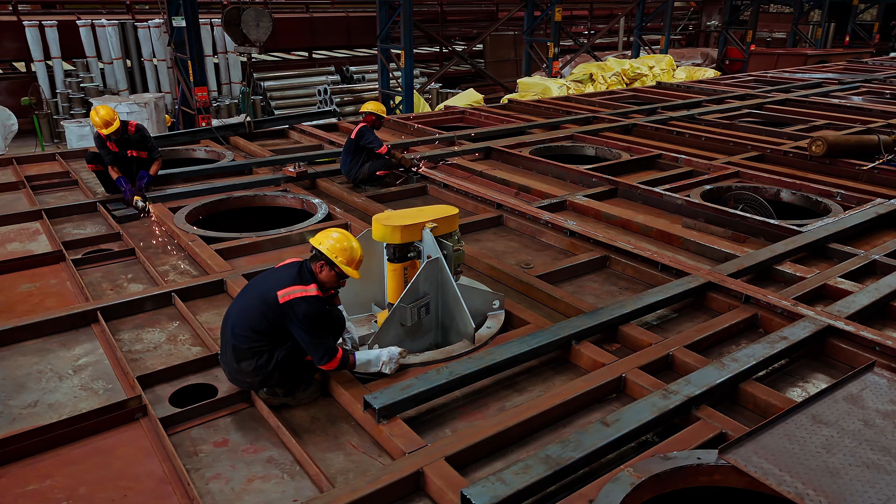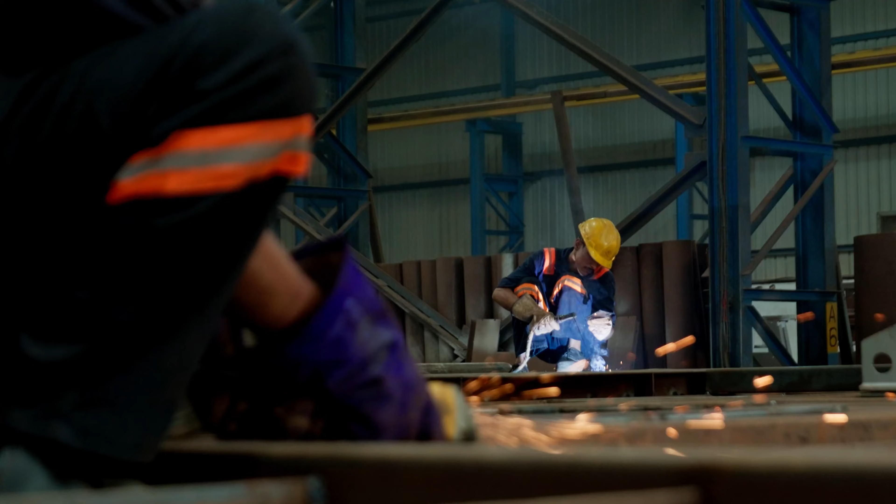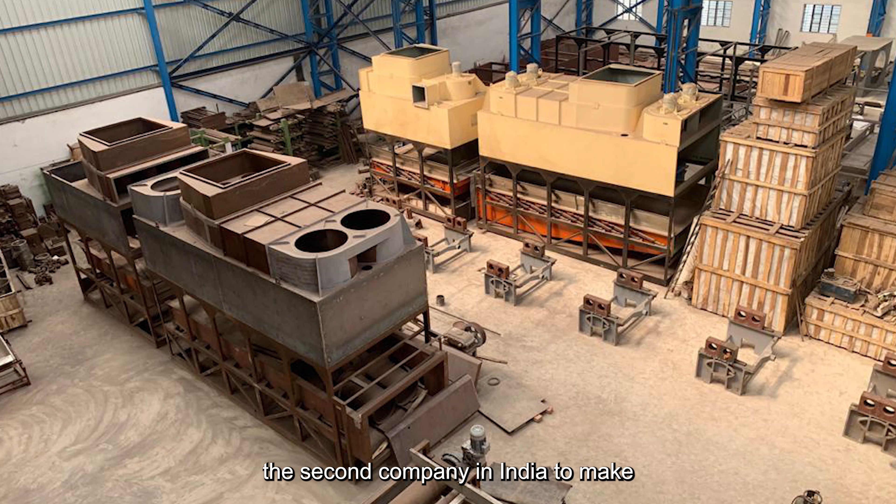For the last 3.5 decades, we've been at the forefront of engineering excellence, pushing the boundaries of what is possible in the tea sector and in the drying industry. Our journey began with my dad being the second company in India to make vibratory fluid bed dryers in the mid-90s, initially for the tea industry.

As the team evolved and the company grew, we ventured into complete turnkey tea factory equipments for CTC, orthodox and green tea processing factories. Some of the innovations that my team and I have championed and pioneered have been...

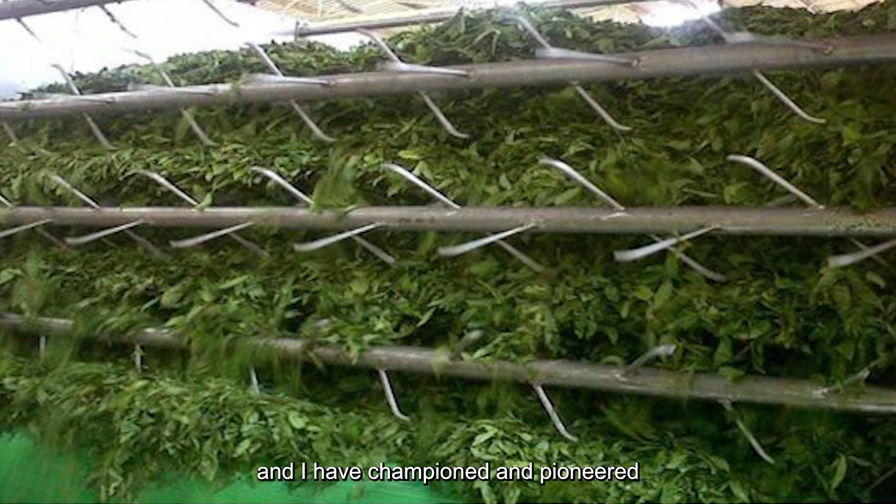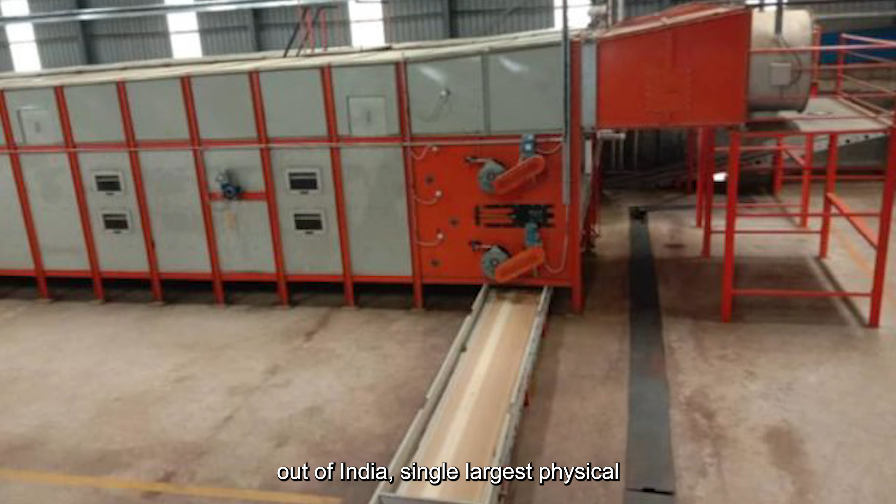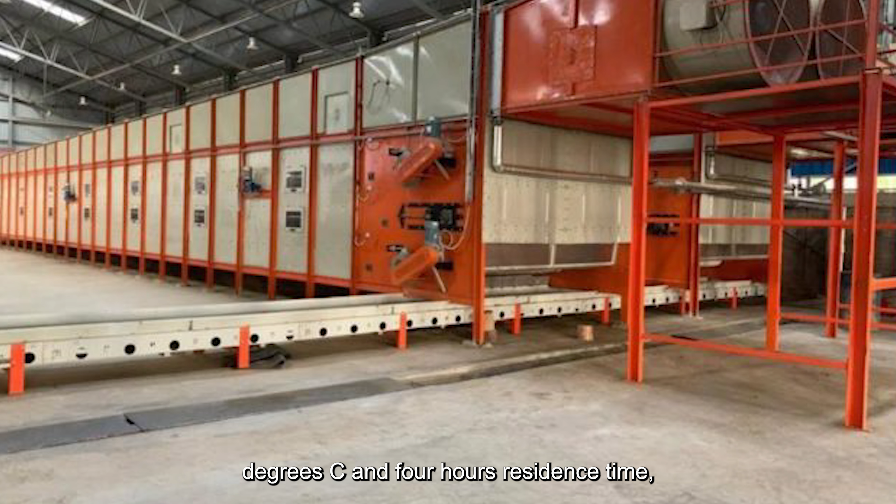The single largest chemical withering trough holding 30,000 kgs in a single equipment, the first tray chain chemical withering trough coming out of India, the single largest physical withering machine with a belt area of 480 square meters, allowing moisture reduction at low temperatures of 34 degrees C and 4 hours residence time, ensuring no damage to the leaf cells. This was the first tray chain physical withering machine ever built in the industry.

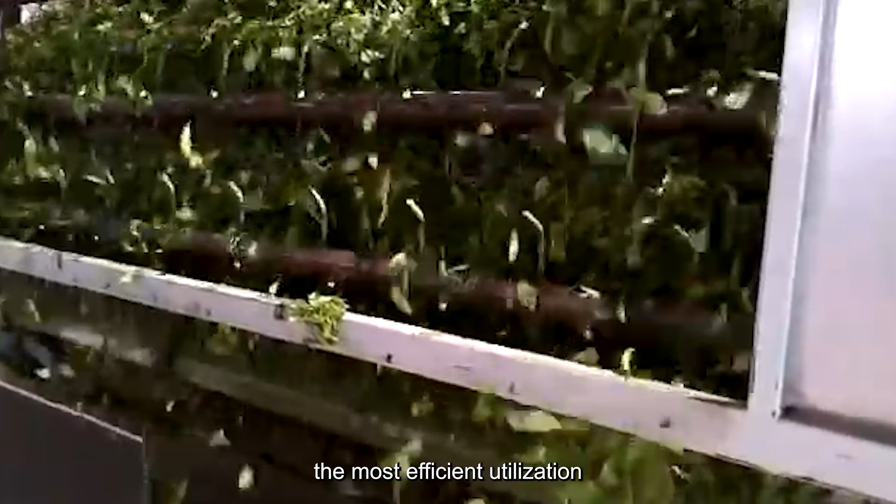And finally, we've done a project of 100,000 kgs of green leaf per day on continuous withering systems, utilizing only 2 workers and 160 horsepower of installed power, the most efficient utilization of power so far in the industry. Our contribution to the tea trade remains unparalleled in terms of value and benefit that tea producers are achieving in their operations.

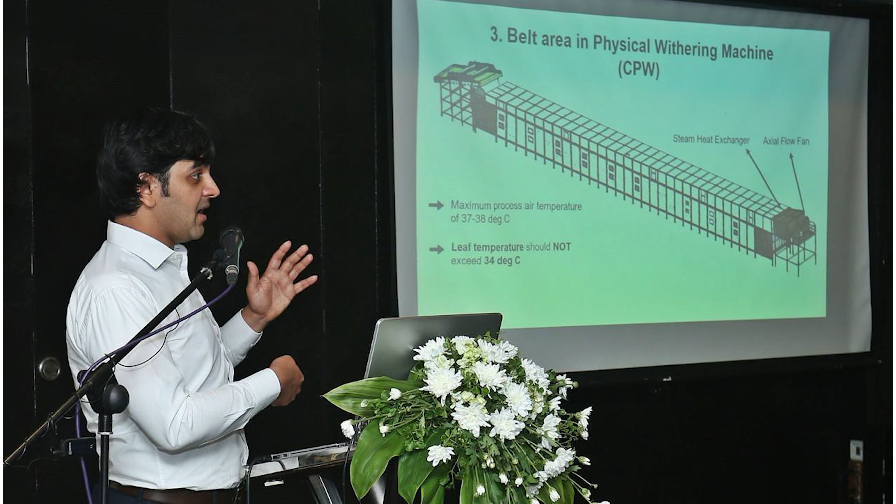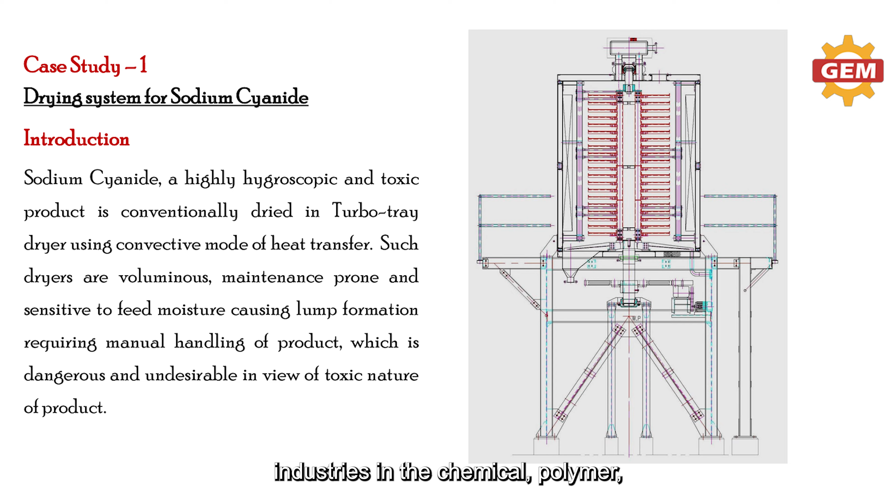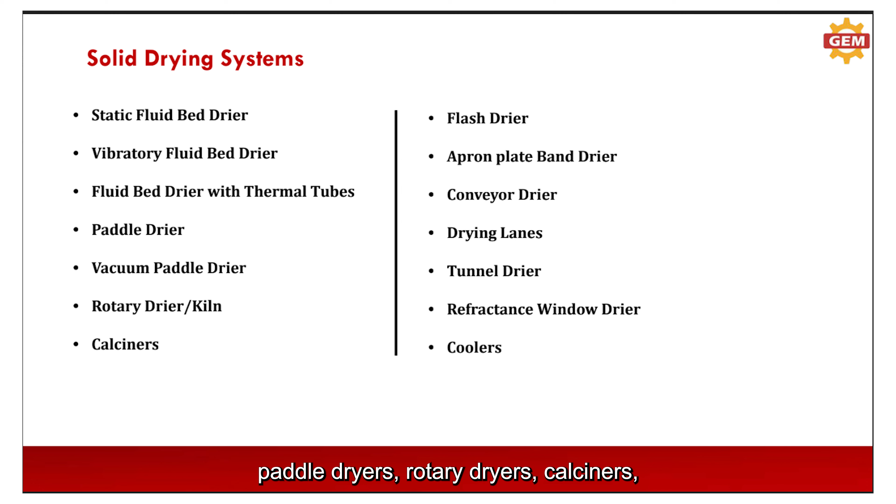Later, we've also got involved in drying systems in several industries: chemical, polymer, fertilizer, and now radioactive space. Our groundbreaking projects have been in fluid bed dryers, band dryers, paddle dryers, rotary dryers, calciners, drying lanes, and tunnel dryers. Let's take a closer look at some of our groundbreaking designs and get a sneak peek into our drying systems.

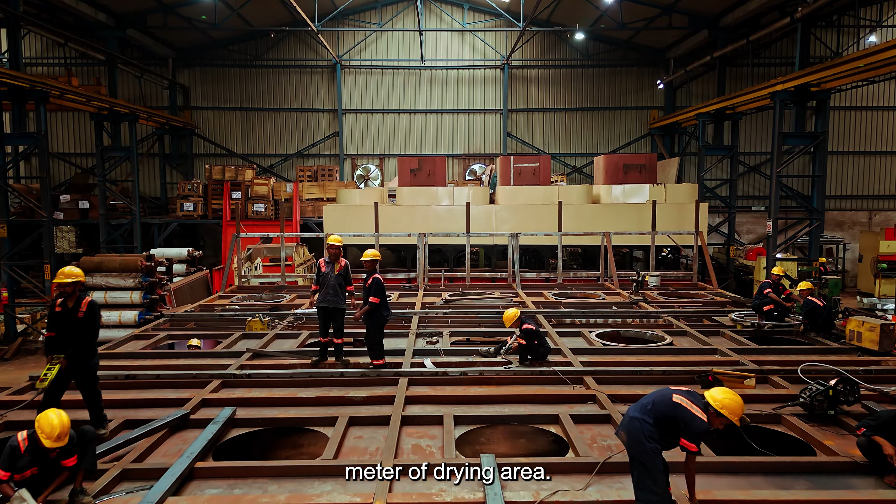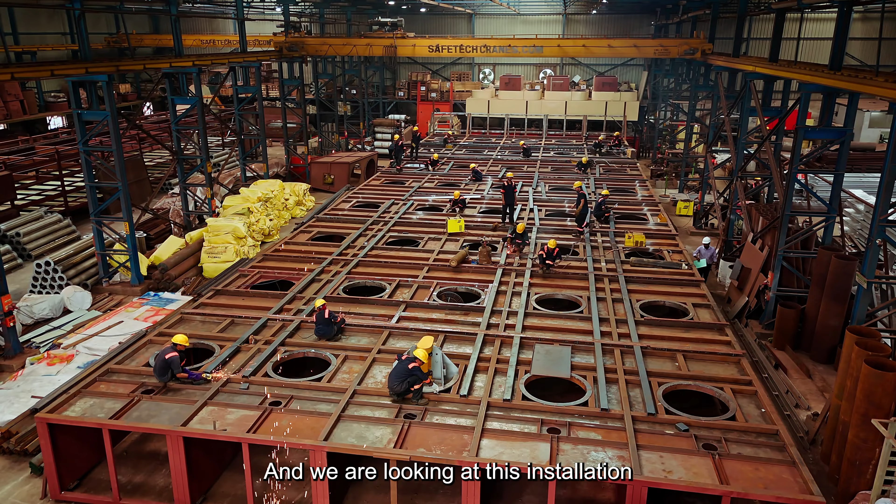We have this equipment that you see over here. It has an overall footprint of approximately 500 square meters of drying area. It has been built specifically for a company that does glass fiber manufacturing. It is actually one of the single largest dryers on the planet today, and we are looking at this installation, commissioning and testing happening in the next 2 months.

I am Mukherjee, working here as the Head of the Department of Central Planning.

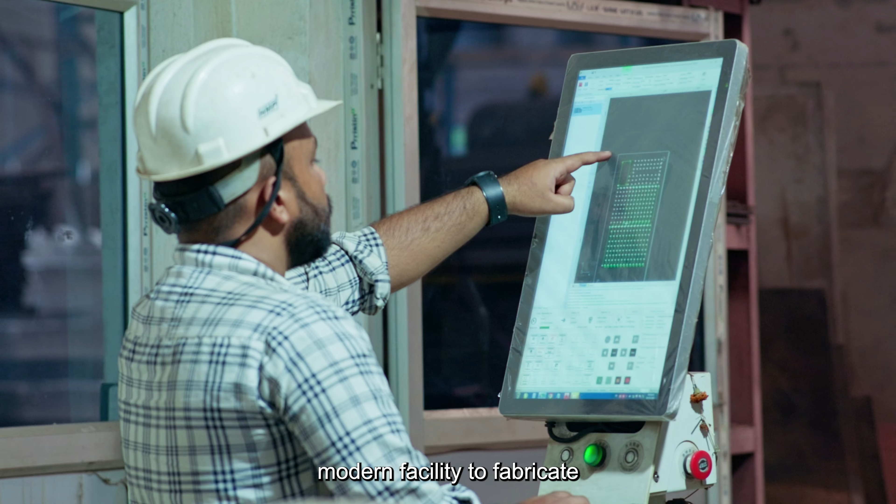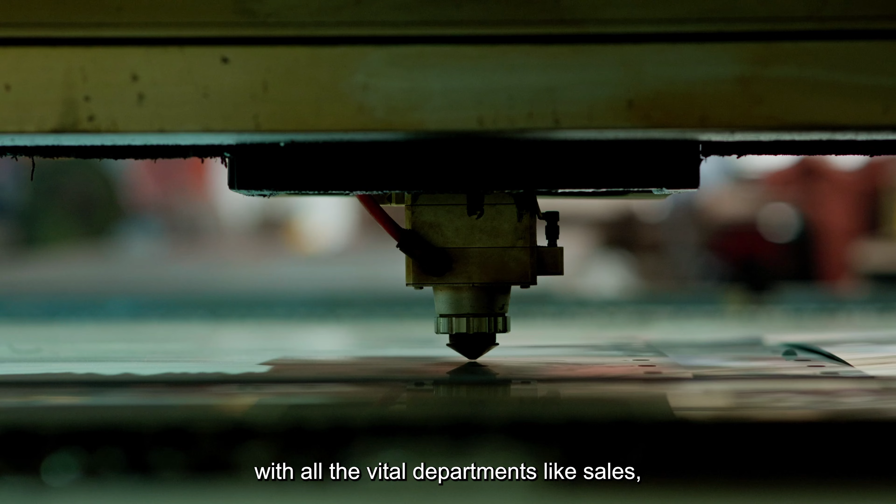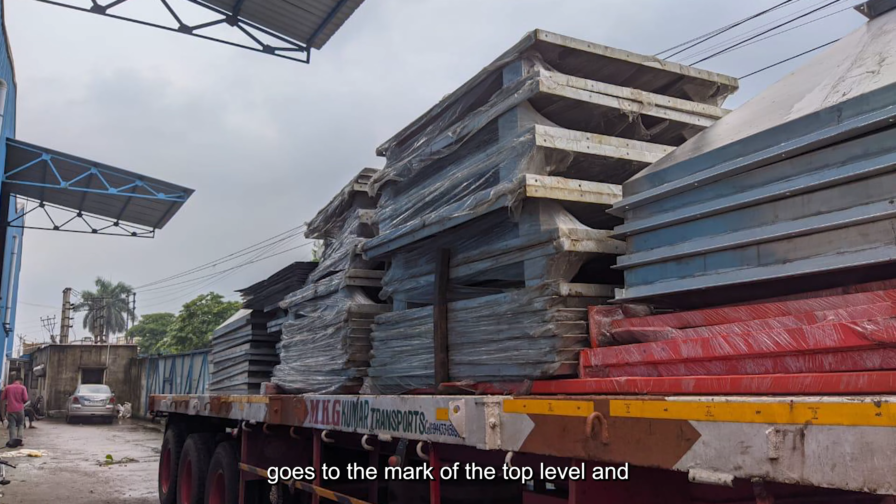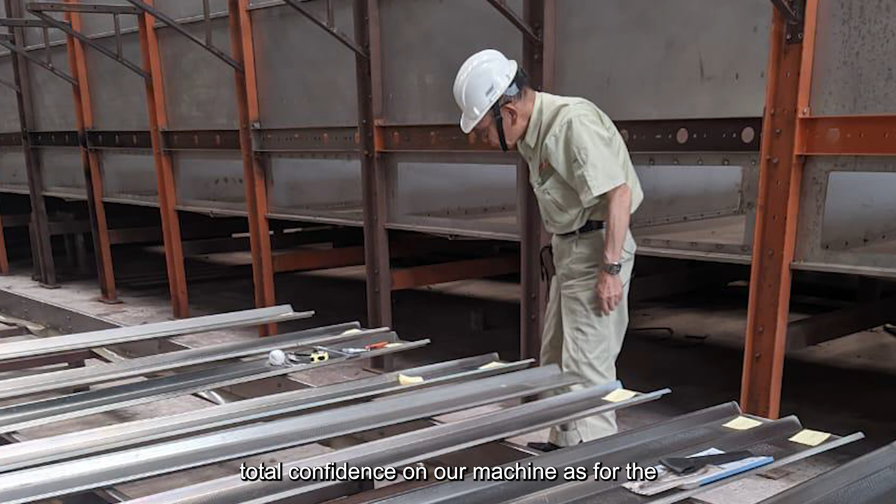Here we have the most modern facility to fabricate all our equipments, which is required in the modern technology. Our work depends on coordinating with all the vital departments like sales, project, design and development, and production up to the delivery to ensure that the machine we are manufacturing meets the top level, and clients are satisfied with the performance of the machine when it is installed correctly and smoothly, having their total confidence in our machine as per its quality and performance.

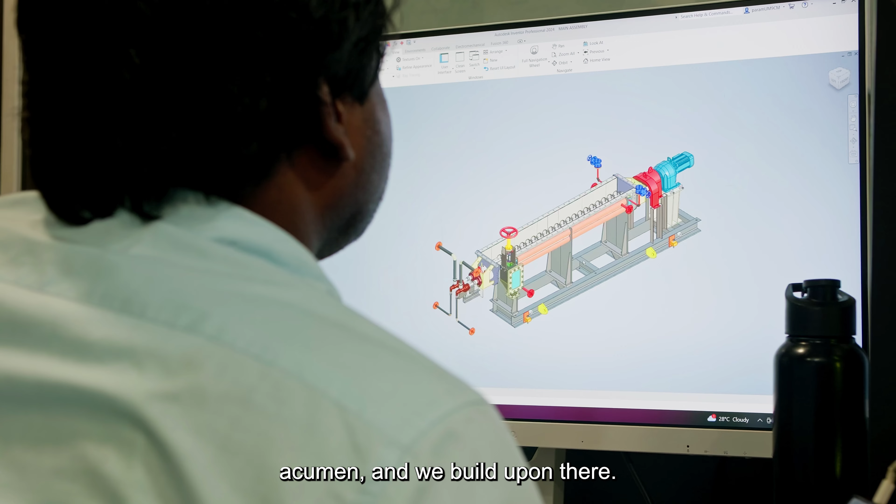In terms of our foreign collaborations, we have associations and arrangements with companies in Japan, Spain, Portugal, France, and Germany. Global Process Concepts in France and Glorinda in Germany have given us access to their designs and engineering acumen, and we build upon their technologies and experiences, integrating those futuristic designs into our machinery.

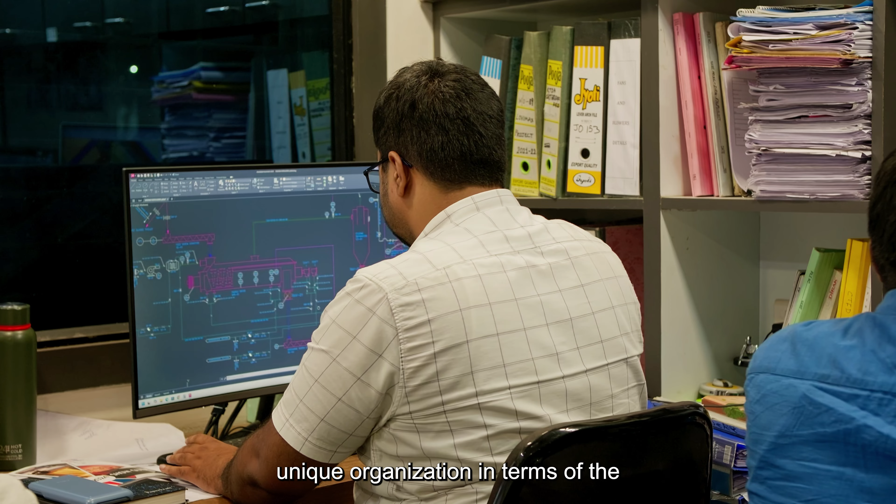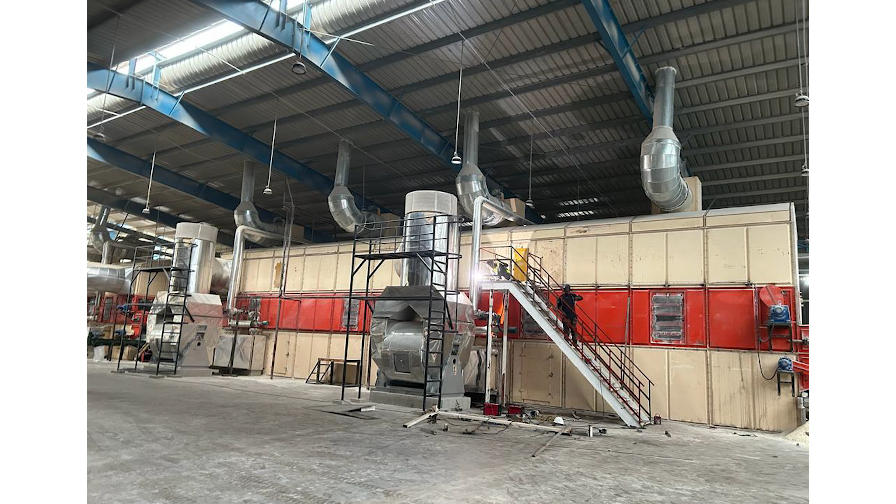Our company, GEM Machinery, is a very unique organization in terms of the knowledge, intelligence, and leadership that all of us have in this industry today. We have entered new markets, launched new products, and are doing extremely innovative projects that this industry has never seen before. We are bringing about tangible transformation in this industry.

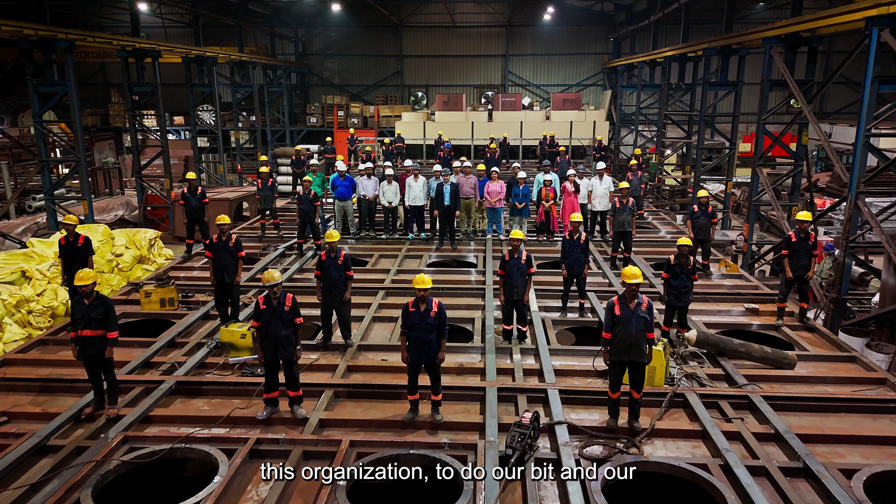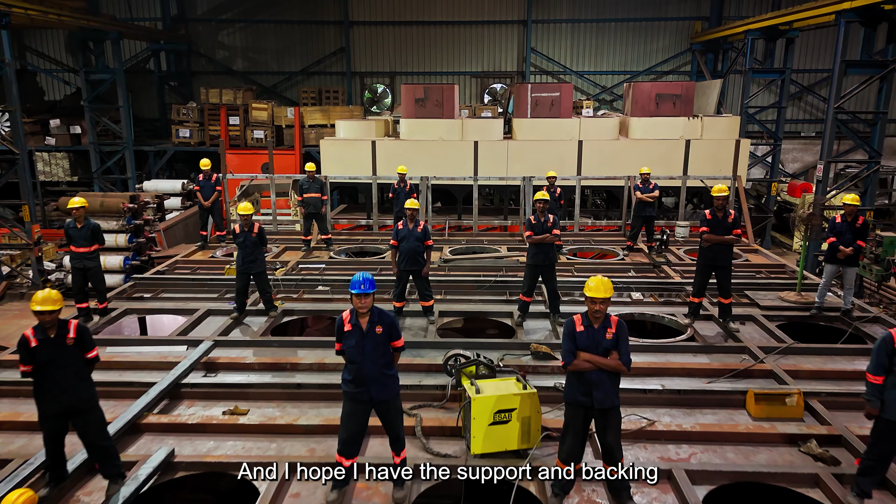I want each one of you to know and understand that the position you're holding and the work you're doing is driving meaningful change in this organization and in the industries we serve. It is the collective responsibility of each one of us to do our very best for this organization, to make sure it rises to the next orbit of transformation and the next level of growth. I hope I have the support and backing of each one of you to make it happen.

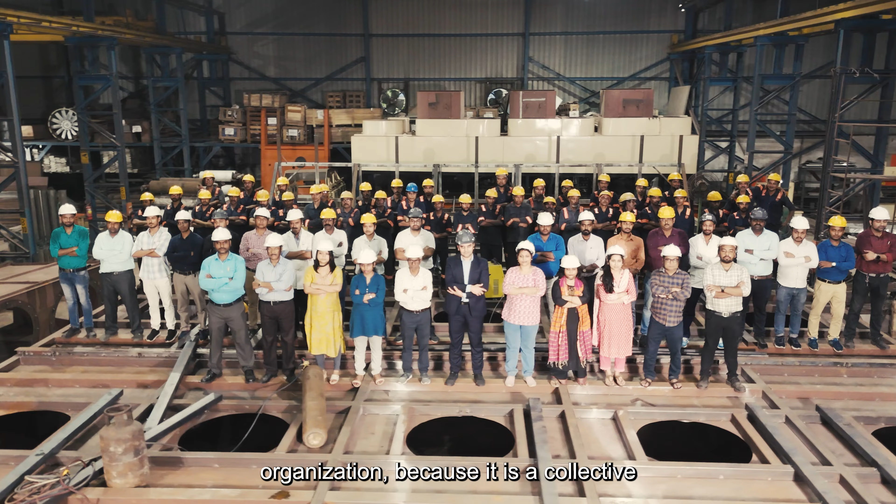We will continue to test newer waters and new markets in the times ahead. I would like to thank each one of you for your participation, for your leadership, for the work you are bringing into this organization, because it is a collective responsibility that can make it happen.

I've had the unique privilege of having traveled to more than 70 countries globally. With my travels and the travel of my team members, we've actually taken GEM to more than 45 countries globally. We have participated in some of the most exacting and demanding trade shows on the planet.

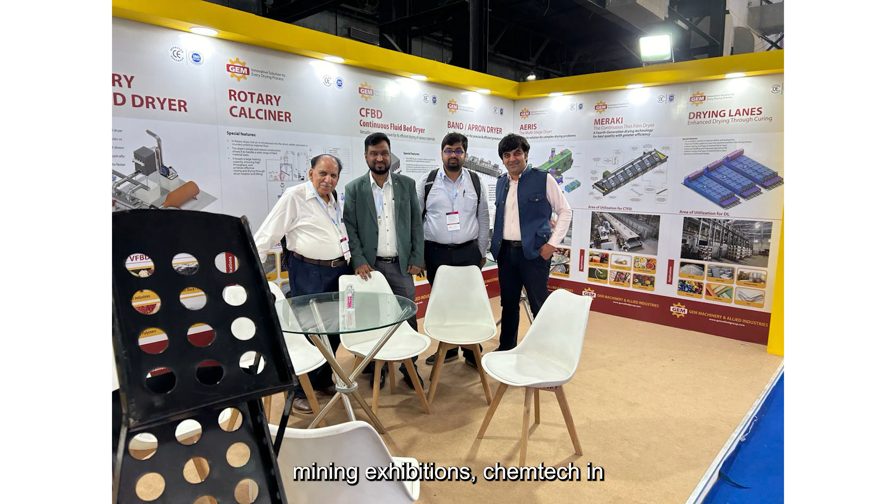Some of them have been SIAL Paris, Pet Food in Kansas City, IFAT Chicago, wastewater management trade shows, mining exhibitions, Chemtech in Mumbai, Chemprotech in Mumbai, and other trade shows organized by the East African Tea Traders Association.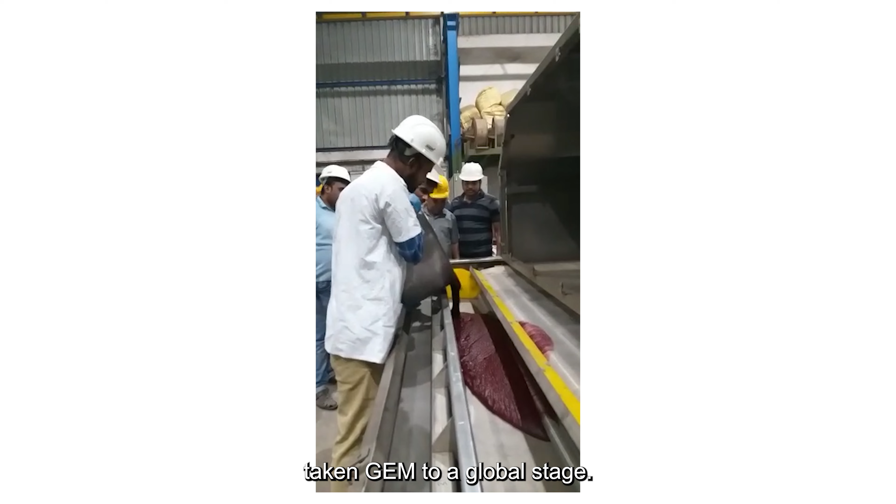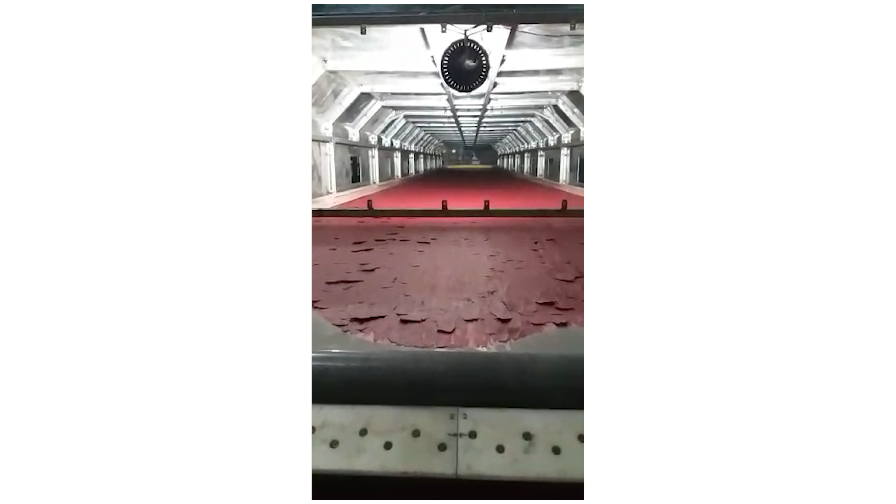Our presence, participation, and presentations in these trade shows and events have taken GEM to a global stage. We get to interact with some of the most demanding clients there. They come up with challenges they experience in their drying systems, and then my team and I put together solutions that give them value for their pain points.

From our headquarters in Eastern India, Kolkata, our impact stretches to more than 45 countries globally, from the high-tech industries of Europe and the Americas to the manufacturing hubs of Asia. We are also present in 22 countries in Africa.

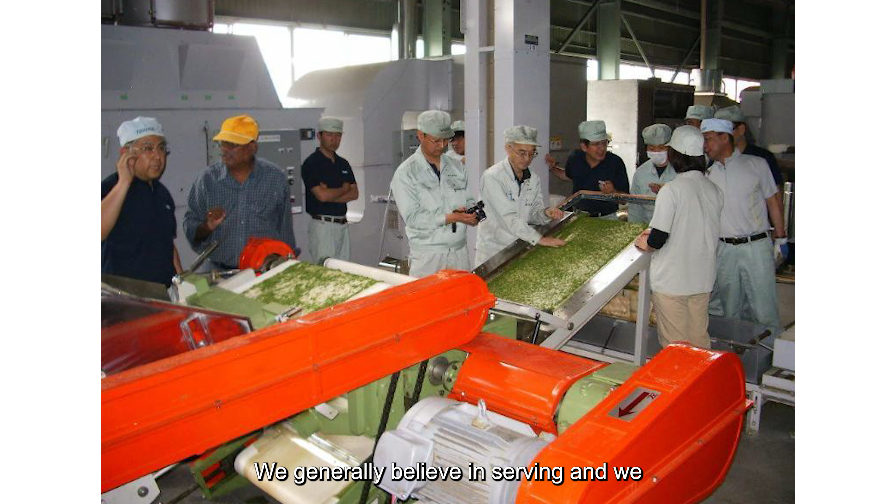My company and I have also done online training and mentoring programs and in-person educational programs. We have had more than 3,000 people from more than 85 countries around the globe participate in these events. We generally believe in serving, and we have given out educational knowledge on our dryers and drying systems and tea factory solutions and continuous withering systems to the industry.

This enables us to maintain a leadership position in the sector, and we continue to drive growth and innovation with these educational programs that we've been delivering.

At GEM Machinery, we also believe in taking up projects that are unique and complex, things that have not been done earlier. We have done projects for a food company in the US, an ongoing drying and calcination project in Canada, a dryer for acai pulp in Brazil, ongoing projects in France and the UK, and tea factory machinery installations in countries from Argentina to Nigeria to South Africa to Kenya to Russia to Japan to Australia.

We have tested the waters in some of the most demanding and challenging places in this space, with GEM equipment in more than 45 countries globally. We speak the language of hope, the vocabulary of execution, and the dialect of innovation. This is what inspires us at GEM Machinery, and we make it happen for you.